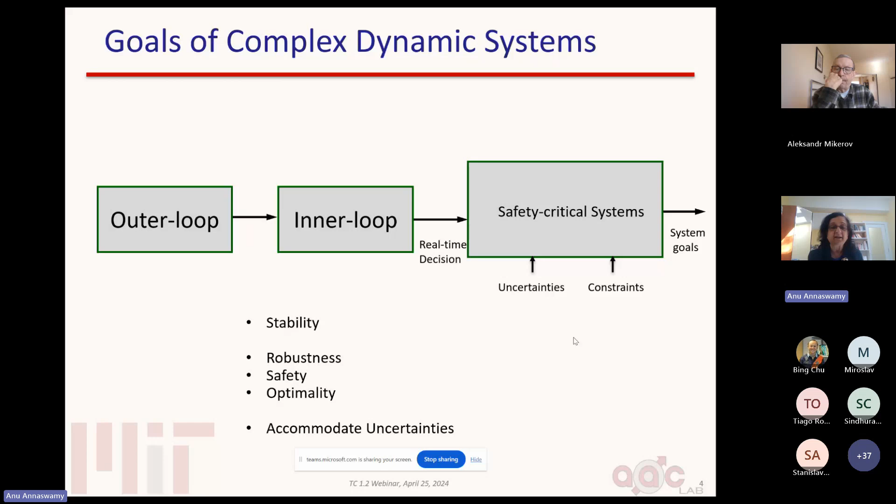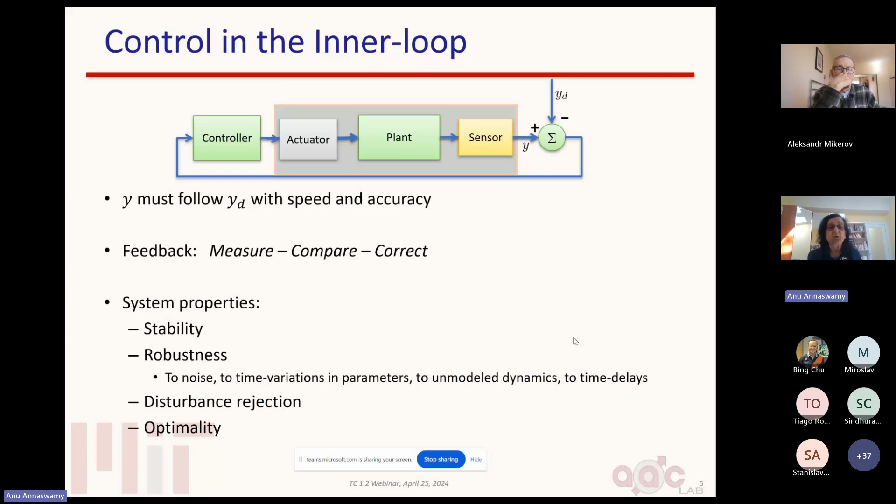As a community, we've been at this for a long time, and we do a lot about what happens in the inner loop. This is basically the origin of how control was defined, and these are the system properties we worried about. If you look at the story all the way from water clocks and flyball governors to control of physical systems, we talk about the footprint, the loci of control in a variety of applications, moving across physical domains of aerospace, automotive, process, healthcare, robotics, and manufacturing.

We are expanding the scope of where controls can play a role, because we look at what happens at the intersection, the nexus between the physical and digital worlds. That allows us to have a handle on these large systems in a large canvas, which brought the conversation to the document being mentioned - that we're not only limited to engineering systems, but really problems driven by societal needs.

Let's just remind ourselves that this is the real framework, the broad framework within which we operate.

The story I want to tell you is my journey into this grand canvas, and the kinds of things that I find fascinating, all of which is really in the context of adaptation.

So if you're going to have uncertainties that occur in real time that you cannot anticipate, and there are actuators that lose their effectiveness, and other kinds of modeling uncertainties, then how do I figure out a way to design this real-time control using whatever measurements you have and from data, so that everything here is data-driven, and whatever prior information you have about the model structure.

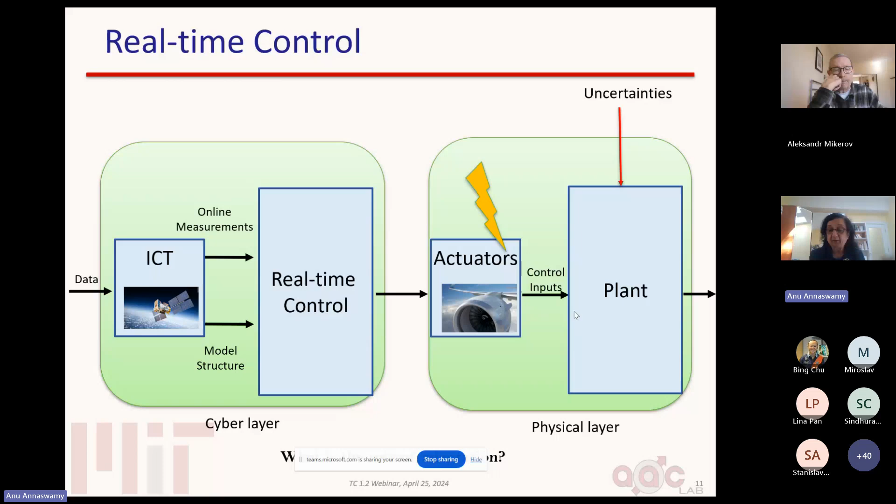I want to basically articulate first - please bear with me if this is a tutorial thing somewhat in the beginning. I was trying to figure out how to gauge what kind of audience I'm going to get, so some of you can probably put me on mute, because I'm just going to talk about some tutorial things and then go on to adaptation and safety, and adaptation and optimality.

The basics of control is about designing the control input in real time so that your state variables and your outputs behave in the way that you want.

But what is unique about it is that we have these learning algorithms as a part and parcel of what we do, and these are of course provably correct. What this provides is not only a way of designing the control input - you come up with these functions C1 and C2 - but you also have a way of learning what's going on.

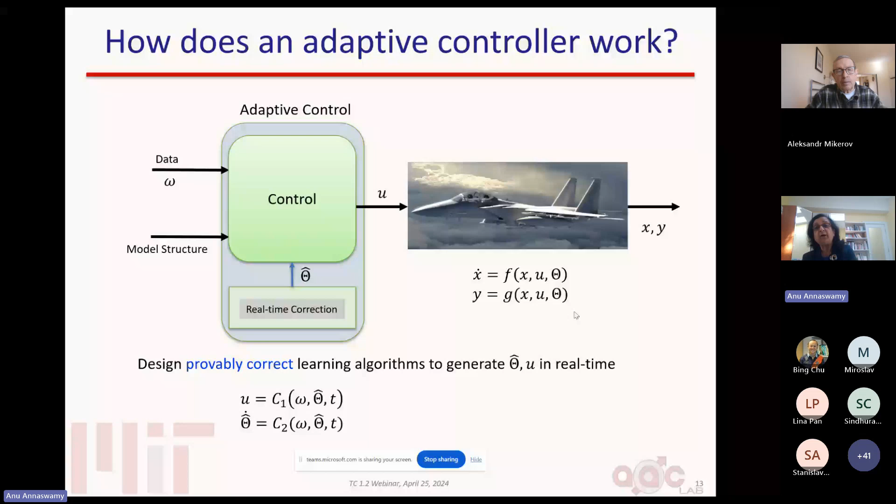And if it is indeed parametric uncertainties, then the parameter estimate theta hat is basically something that learns what's going on. So while you might do control in a faster time scale, with hindsight, you do want to learn. That's really the goal.

So let me walk you through this, in case there are students listening to adaptive control for the first time - this is for you. If you have a simple first order system, the name of the game here is that AP is unknown, and you're trying to design a way to control it.

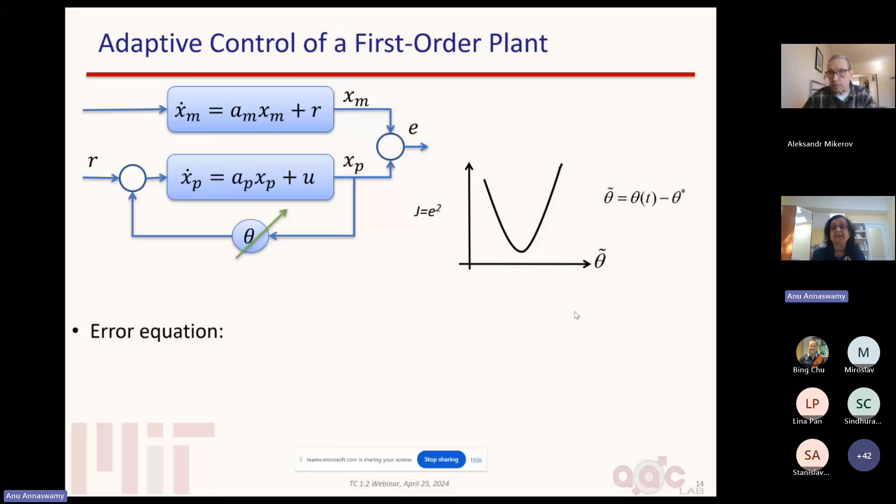You've set up what's known as the reference model, and you look at the error to say, hey, is it possible to minimize this error in some way by adjusting the estimate of what you want in the feedback loop, which leads to an error equation.

Normally, what we would do is adjust the cost function J and look at the gradient, using a gradient descent approach and all of these things. But it's not always possible to make sure that it'll lead to a minimization, because a cost function might not look like this.

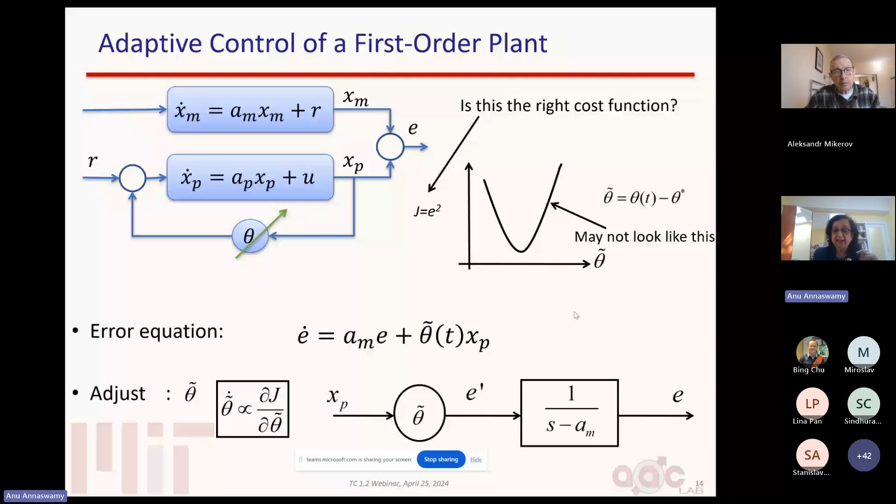It turns out that you can still come up with a way to figure out what the right algorithm is. Ideally you would like, for instance in this particular case, to have access to E prime, which is the signal driving the error, but you don't have that.

So if you were to use this - and there's lots of work that's been done in the extremum seeking literature that tells you different ways you can get around it.

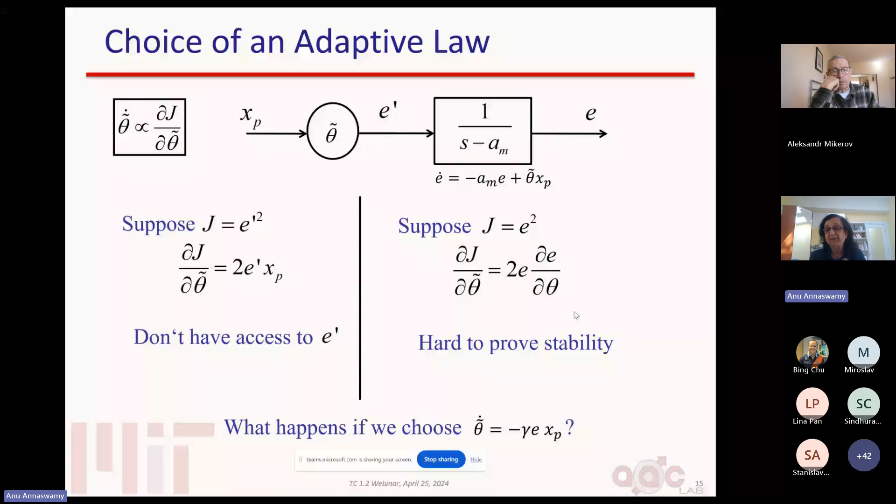But the basics of adaptive control really started out with, hey, what happens if you were to do something like this? The reason this works is because not only are you able to design this controller, but you're able to provide a stability framework that says there is some sort of energy function, a positive definite function that is going to be non-increasing. And so, hey, you have your foundation right.

And we can extend this to when you have all the states accessible. Of course, your Lyapunov function gets a bit more complex. But the idea here still is that you can design a state feedback where you're adjusting the parameter and feedback loop. We can do that when only some of the states are available, using the notion of a strict positive real operator.

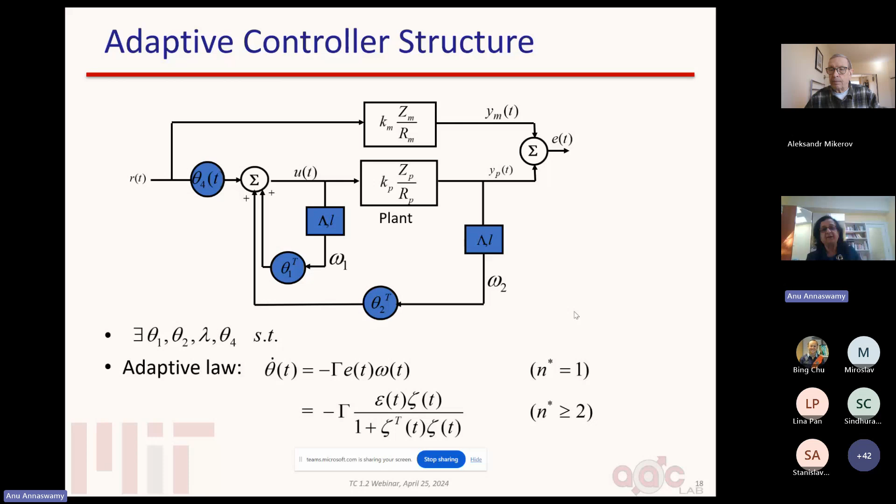And then you can use the notion of augmented error, or there's a variety of different tools right now available. One can use backstepping, with systematically laid out ways in which you can figure out how all of the different parameters that allow can be adjusted when you have a large relative degree between the input and the output. And of course, all of these things can be extended to when you have unknown nonlinearities.

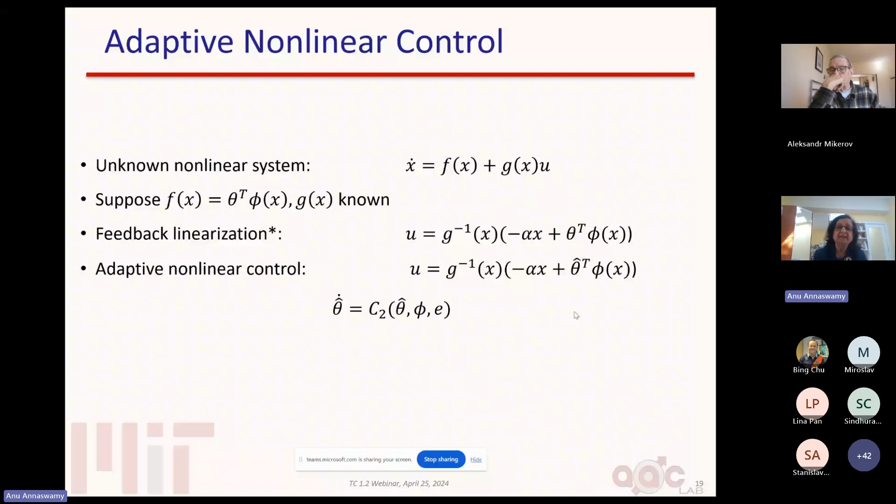And so this is, again, just a very, very simple example. And Miroslav's book really details it very well in terms of what you can do if you don't have feedback linearizing structures. But if you do, then the idea simply is that the adaptive nonlinear control tries to estimate the parameters, and you can come up with ways in which the parameter estimation can be done, and again, provide guarantees.

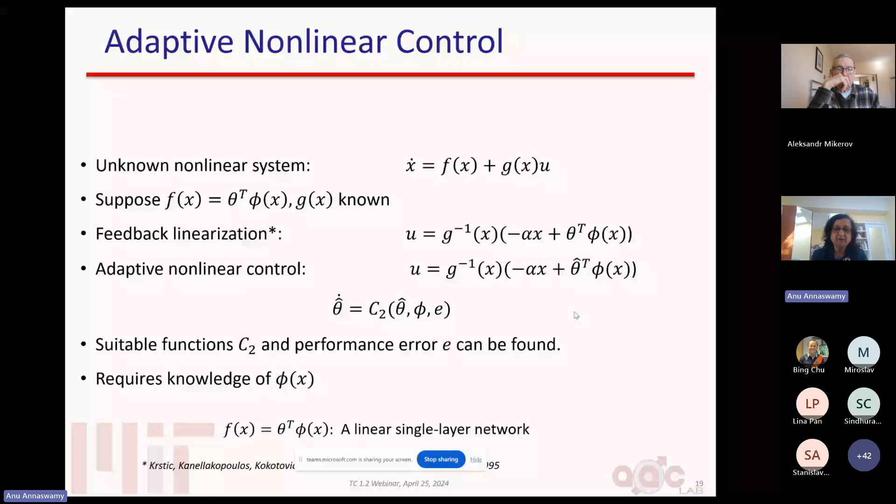And so there is also a link between what one can do between these kinds of things and neural networks. If you start with a simple linear single layer network, then basically they become coincident. And again, like I said, there's lots of other ways, structures that have been laid out very nicely.

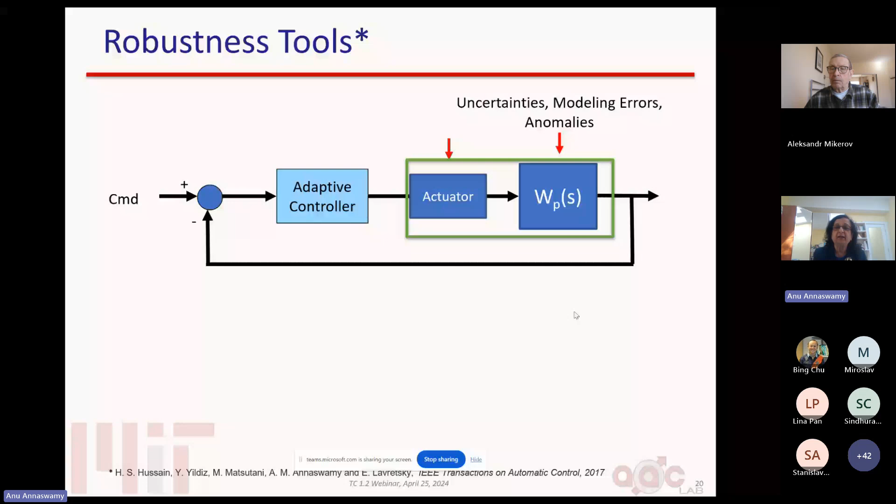And one can take all of these things as a basis and then introduce other kinds of uncertainties now into the problem, which are not parametric, in which case you're not really be able to adapt to them, but you accommodate them using robustness ideas. So here, the notion is that you have some sort of a baseline controller, but then you might have actuator uncertainties because the actuator has some sort of a lag, or there are other unmodeled dynamics. And there are ways in which we can guarantee that there is robustness to these kinds of uncertainties as well.

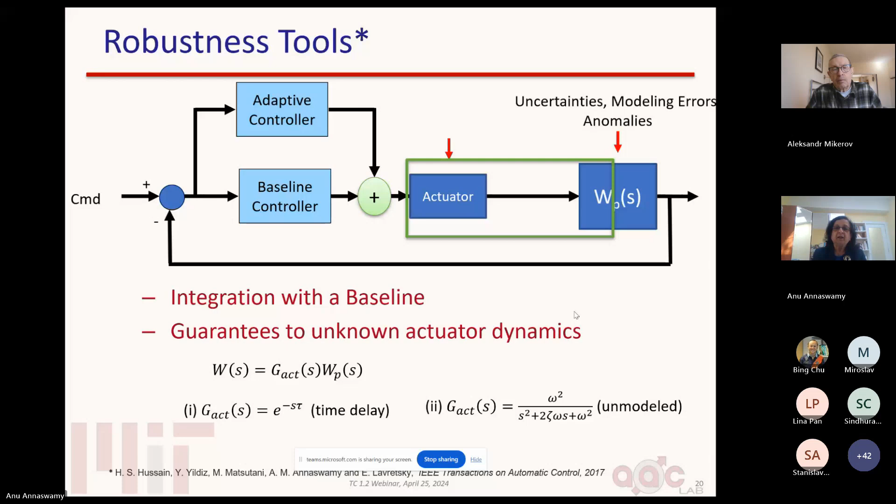Okay, so let's just focus a little bit on learning. And again, like I said before, learning is part and parcel of adaptive control, which sort of distinguishes it from some of the other methods that don't necessarily have an explicit learning component.

And so the idea here is basically that while you are after a certain performance error, you're also trying to learn the parameter. And so the parameter error, the parameter estimation algorithm, gives you a way of learning these uncertainties.

And again, I'm happy to have an offline discussion if there's more questions on this.

So how does this happen? How do you actually guarantee that you can learn? You basically invoke the concept of persistent excitation, that says if you have these properties where whatever is driving your parameter adaptation, which is some sort of a regressor that consists of key variables in the feedback loop, if there is a certain uniform observability property, there is a linear independence in the data that you're getting, there is some excitation in the data that you're getting that allows you to probe all of the modes of the system, then that allows you to get to learning.

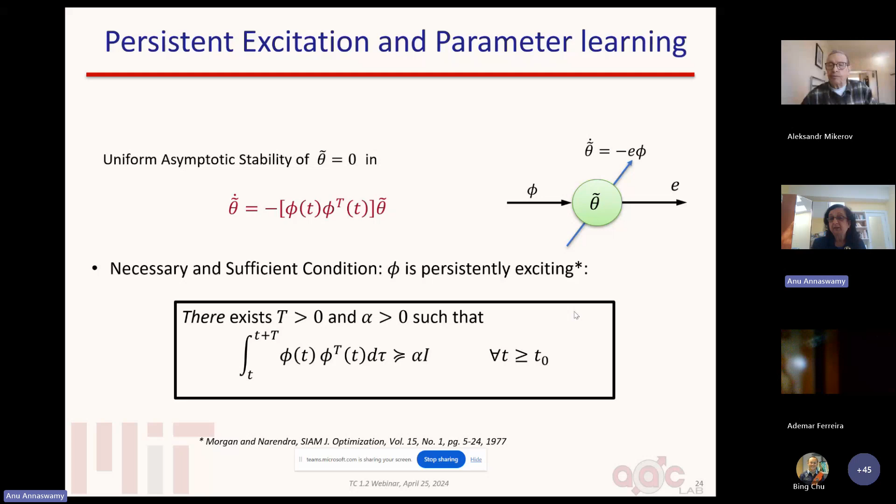And what is great about this is that this is not just a sufficient condition, but it is necessary, which means that if you don't have it, you really cannot have learning. Now, excitation means that your exogenous signals, your command signals, whatever is extraneous to the feedback loop, needs to have these properties of excitation, which is also known as exploration in the machine learning world. So now, if you can't do that, if that is counter to what your mission goals or system goals are, then you have a problem, which is that you really are not able to learn.

Which brings us to imperfect learning. So it is possible that performance and learning, in some cases, are conflicting objectives, which means because it's a necessary condition that you have excitation, if you don't have excitation, you have to acknowledge the fact that you can have imperfect learning.

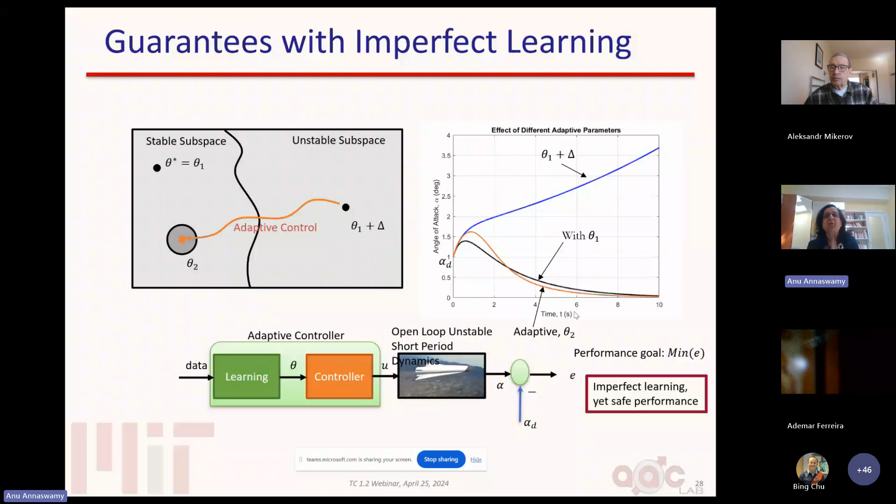Because you're in that null space, you're okay, and you can accomplish safe performance even in the presence of imperfect learning. This is a very, very important point that is really missed by a good part of the machine learning community, unfortunately.

So you have to keep this in mind. There are some excellent papers that Brian Anderson has articulated which get into a lot of the details, but here is the main idea.

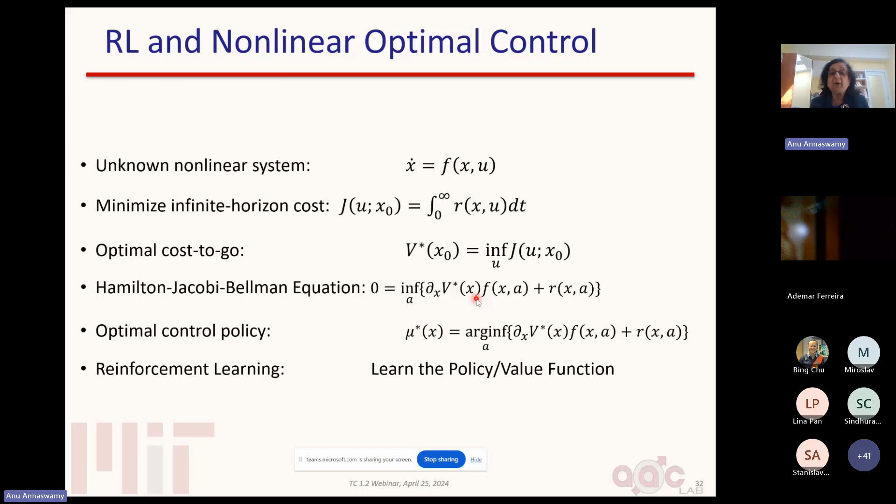So reinforcement learning is all about learning the policy function or the value function. The problem basically arises when you bring in uncertainty. If everything is certain and you know all the different transitions, you can evaluate the cost across each of these branches, and that's great — you can use dynamic programming, which gives a very elegant solution for HJB equations.

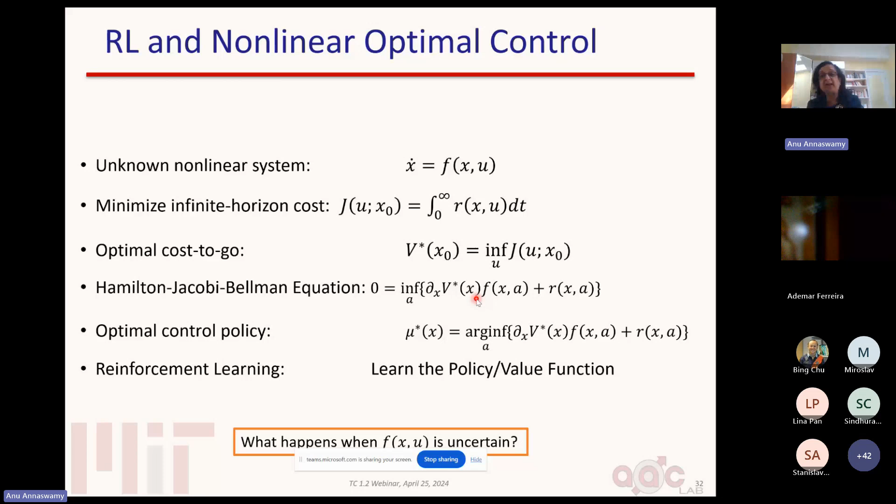But the problem comes in when you have uncertainties. Now all of these value functions have to be replaced by their estimates, which is where neural networks have really come into the story, bringing in a parametric structure. And the moment you bring in a parametric structure, there are all kinds of parallels to adaptive control.

In this case, what we're trying to do is say, I don't know something — the value function or the policy function — so use a neural network to approximate it. In order to do that, you come up with some sort of parametrization of that structure.

The nice thing is that there's a very nice basis of universal approximation that says, yes, if you use these activation functions and several layers, the deeper it is, the deeper the learning. All of this gives you a way of approximating any arbitrary nonlinearity, and you estimate the weights using this well-known gradient approach we've discussed, which brings in the notion of a backpropagation algorithm.

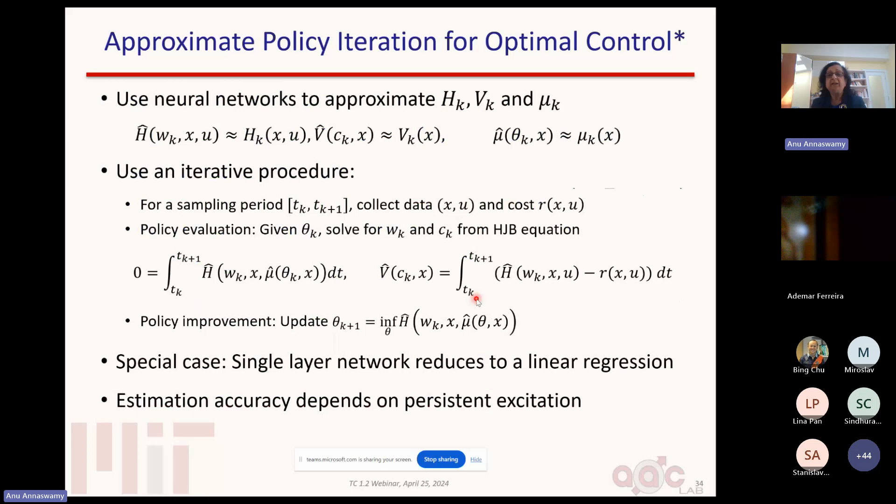It turns out you can do all these approximate policy iterations and so on, an iterative procedure. But I want to focus on a couple of examples where, if you take all of these things, you can come up with analytical guarantees.

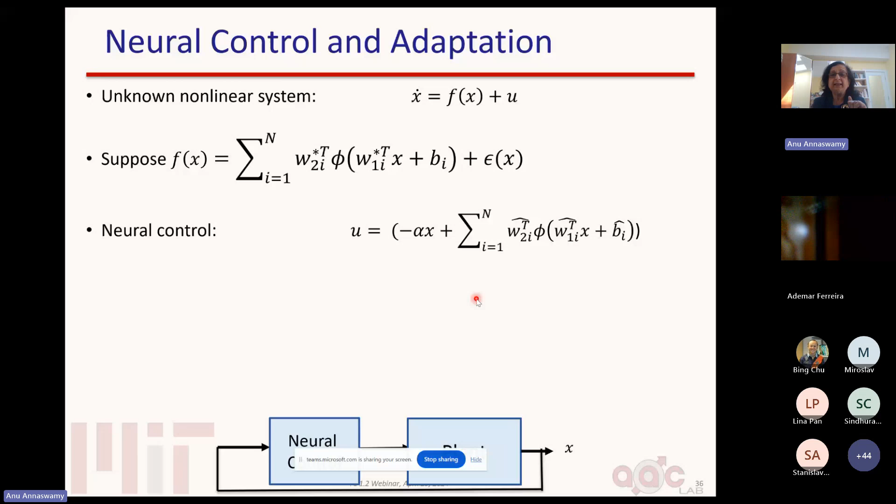This is one we did more than two decades ago, where we say, okay, here's a nonlinear system, and I'm trying to come up with a controller. Let's suppose I use something like this neural network. Then, is there a way in which I can come up with an adjustment procedure?

This problem is extremely difficult and really open. Nobody has been able to come up with a complete, accurate solution. The reason is that the problems of non-convexity have to be addressed, and the stability of adjusting the nonlinear weights addressed, because even though W2 might be linear, W1 is not, and that's where the difficulty comes in. There are all kinds of errors of approximation.

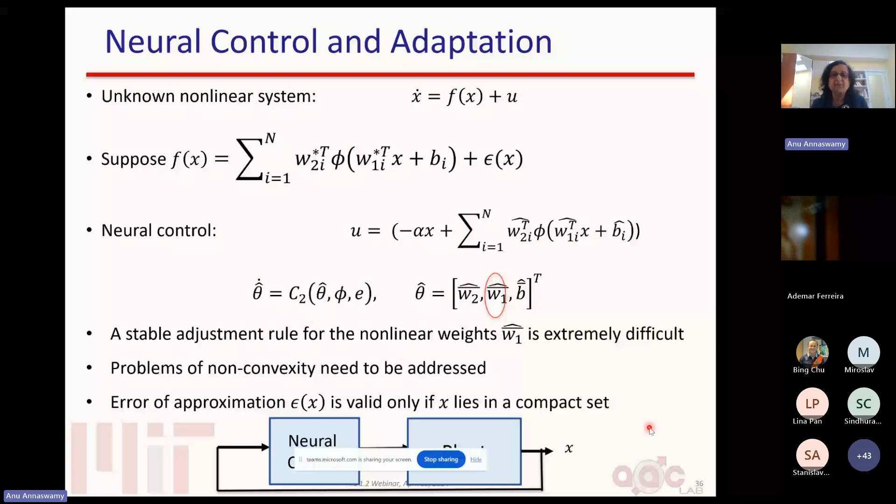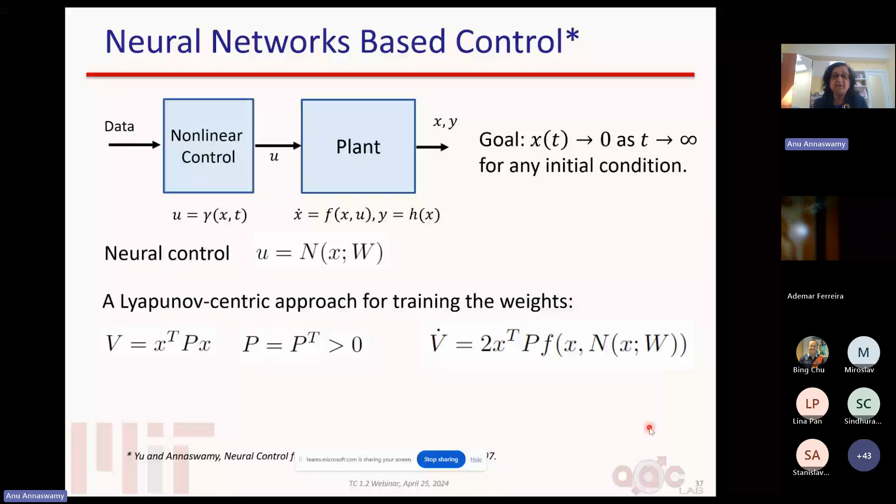I'm not going to go into the details, but basically what we were able to show was that if you use this neural control, you can come up with a Lyapunov-centric approach for training the weights. What you do is look at the corresponding derivative, pick a desired target, and use this difference between the desired target and the actual derivative as a loss function. When you introduce this kind of training procedure, you can come up with a guarantee that this neural network-based control can give you stability.

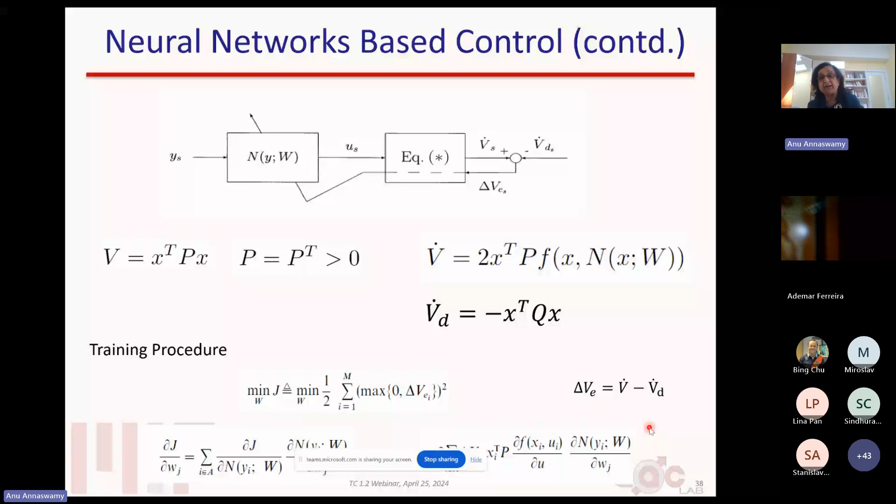So it's one of the few results that basically tell you that you can use this neural network and guarantee that locally you are able to get an approximation. The nice thing is that you can really look at very nasty nonlinearities, and it gives you a way of actually coming up with a neural controller.

It's an added advantage if you were to just linearize it, and because we said it's a local result - if it's local, hey, why not use a linear system? But we can clearly show where the adjustment from the neural controller comes in, so that it really expands the scope of what you can do, and that's very clear.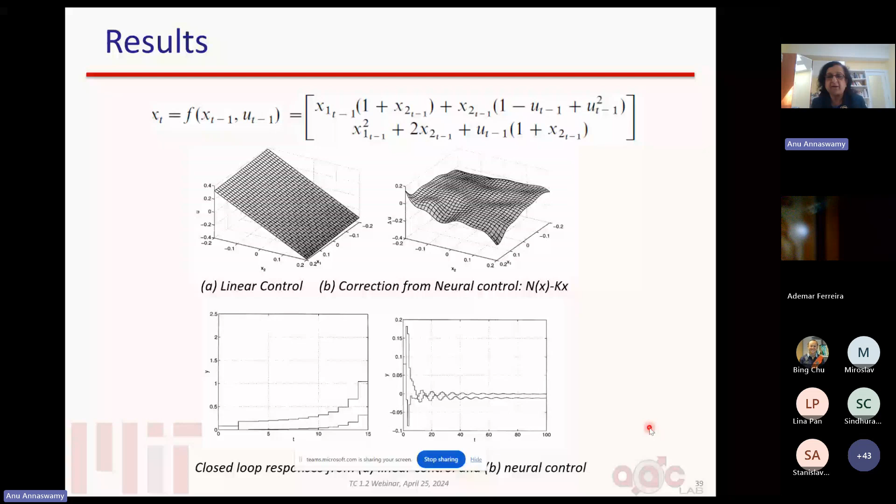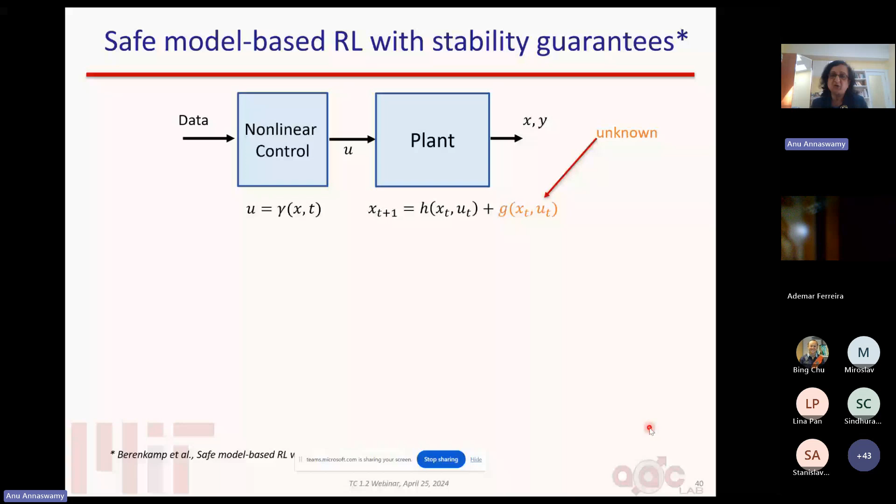There's also been other interesting results or ways of looking at this problem. Here is one that I find particularly compelling: if you have these extra uncertainties in the form of this nonlinearity G, you can still design the input and have an optimal policy. The optimal policy basically comes out of this particular inequality that you need to minimize.

The nice thing about it is that the way this is structured, the cost function is picked in a way so that it's not just optimizing from minimizing a cost function from an optimality point of view, but basically integrating it with a stability point of view, such that all of the solutions you find for your policy should be such that the corresponding Lyapunov function candidate is inside a level set. By doing this, they were actually able to essentially guarantee it.

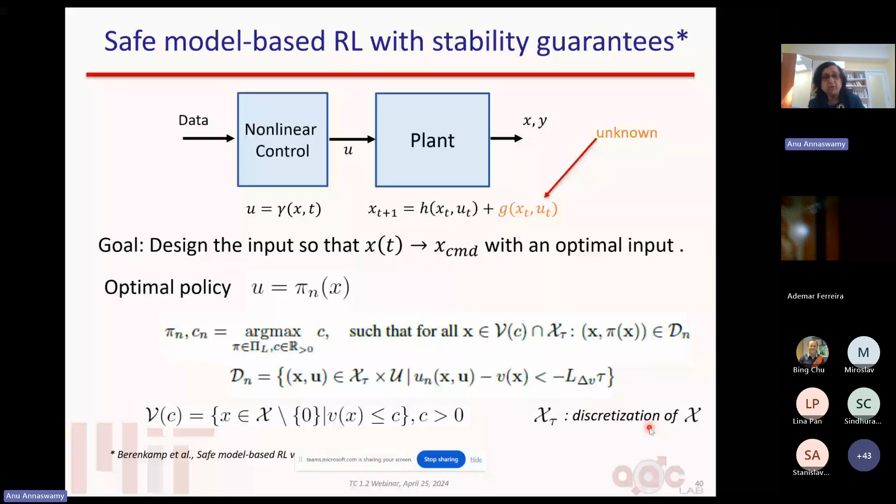So this is basically the whole world of safe reinforcement learning, which says that this kind of structure allows you to make sure that you stay within a domain of attraction for a certain region of initial conditions.

Sorry, is there a question? Yeah, sorry, Anu. If you look at the screen, at the bottom, there's Teams sharing screen - stop sharing, hide. Can you click hide? Okay, got it. Thank you, yeah, thank you. I didn't know what to do with it. I thought I was seeing it only at my end. Thank you, Bing, I really appreciate it.

Okay, all right. So they also provide a nice implementable training procedure, but you have to keep in mind that the tools that have been proposed for stability are often not exactly the same as the tools that have been shown to be very successful and doable and implementable. So there is a big gap between what is analytically justified versus what actually goes on in terms of the practical implementation tools.

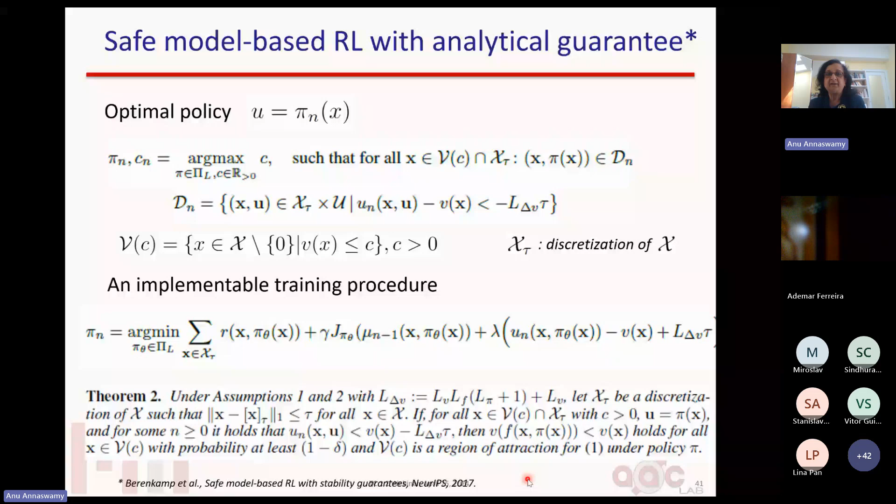So all of this is basically what I wanted to say in terms of adaptation and learning, and I hope you see the rich intersection and integration between these concepts that are really joined at the hip. There's so much more to do to really understand how these things can be played.

But I want to now move on to other systems goals, and the two things I want to talk about are safety and optimality. So let's start with safety - we're really talking about state constraints. There are any number of problems where you really want to make sure you meet a certain performance, but at the same time really make sure you do not wander into unsafe regions.

In the context of cruise control, you want to follow a lead vehicle, but you want to make sure that you always maintain a certain distance D. So anything where your position is less than D is unsafe.

Same thing with aerial vehicles. If you have missile dynamics, you don't want to stall. At the same time, you want to meet whatever your performance goals are. In robotics, obstacle avoidance, you want to reach your goal and target within a certain time, hopefully optimally, but you want to make sure that you don't hit any obstacles.

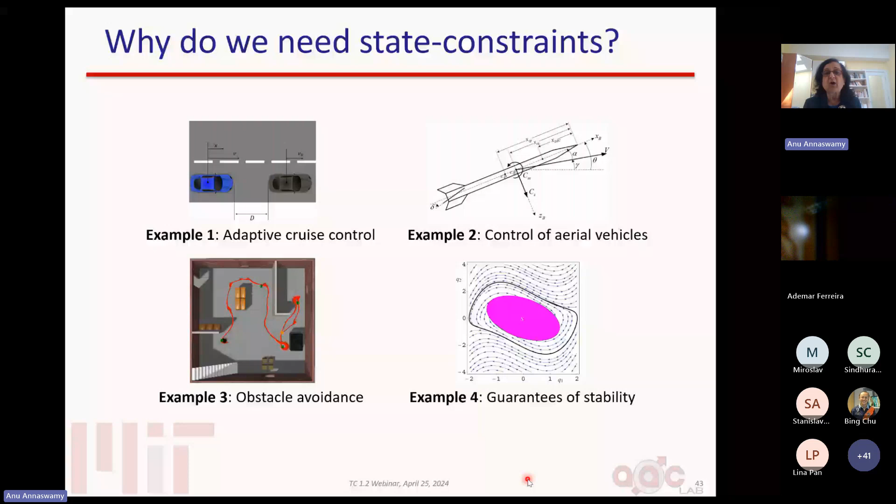So there are all of these kinds of problems that say anything you're trying to do has to meet safe constraints, and it's not easy to do that.

Because let's say you're looking at theta and theta dot as the state variables, and here's a phase variable plot on the left side. If you really only look at the baseline, and the ellipse is the safe region, you can start somewhere, but you really don't know these level sets in terms of performance.

So you wander and you go way outside and you come back. Obviously, this is not something that you want. It's not a good idea.

Whereas it is possible, as you learn and integrate some of the key pieces. One of the tools that has become highly popular recently is what's known as control barrier functions.

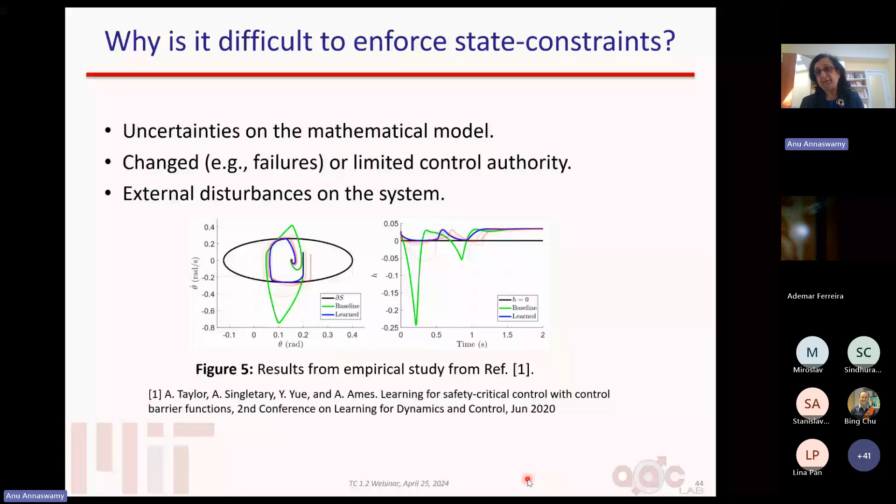These then allow you to learn how to be safe, right? So that's really what we're after. So let's now bring in the problems we've looked at. Is it possible for us to do both—have performance and at the same time remain safe—when you have real-time uncertainties? That's the challenge here, and how do you meet these two things?

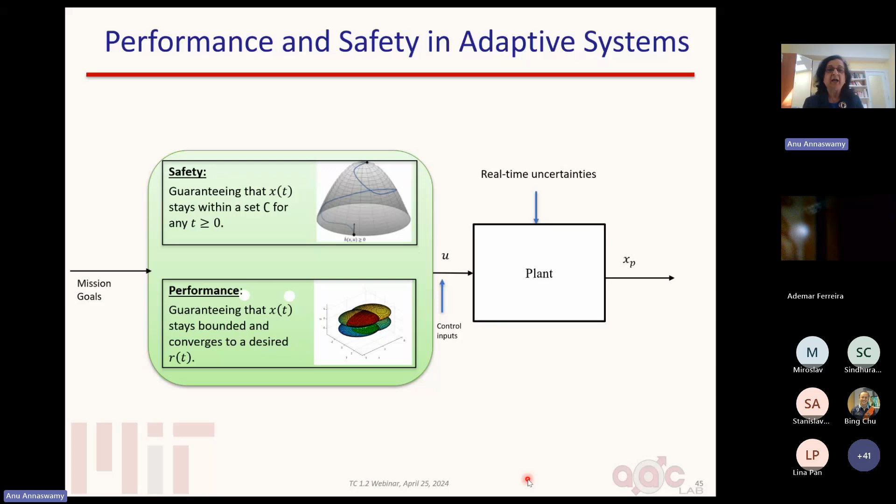There's a more philosophical journey one can take here, which is that real-time decisions—things we do in adaptive control—are one kind, and those that come out of CBF types of designs are another kind. You can argue that what we're trying to do is always predicated on a structure of a model, whereas the computational control pieces come from model-free kinds of things.

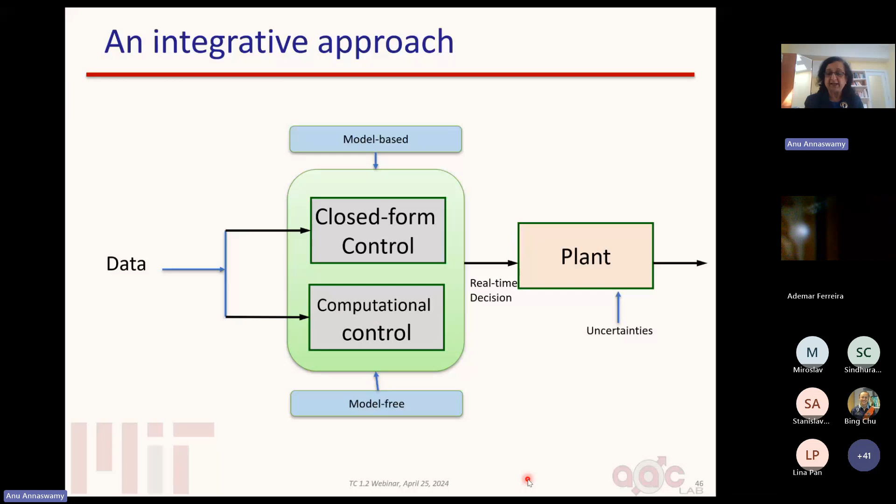Let me explain. One of the examples we did—I'm going to skip the video, not play it here, but play it later—is a closed form example. In this particular case, it was a quadrotor, and here is a structure that we imposed on the controller.

We stuck our neck out and said, for whatever reason, I'm going to have a state feedback structure. And as far as I'm concerned, I'm going to search within the manifolds determined by this closed form expression. Here is basically how I'm going to carry out the adaptation. And it turns out it works—again, I'll show this later.

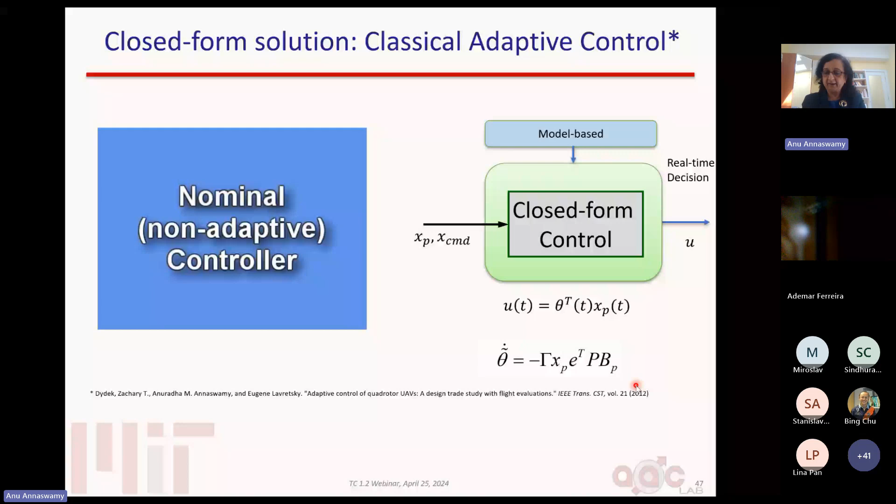Computational control, on the other hand, says I'm going to come up with a real-time decision which basically spits out the control input, and it has to be such that it satisfies this implicitly—I minimize something subject to something. So I'd put this under a computational control thing, where you're not asking for a whole lot of information or imposing assumptions on what F and G and all look like, but you're basically saying, if this is satisfied, then I have a safe way of going forward.

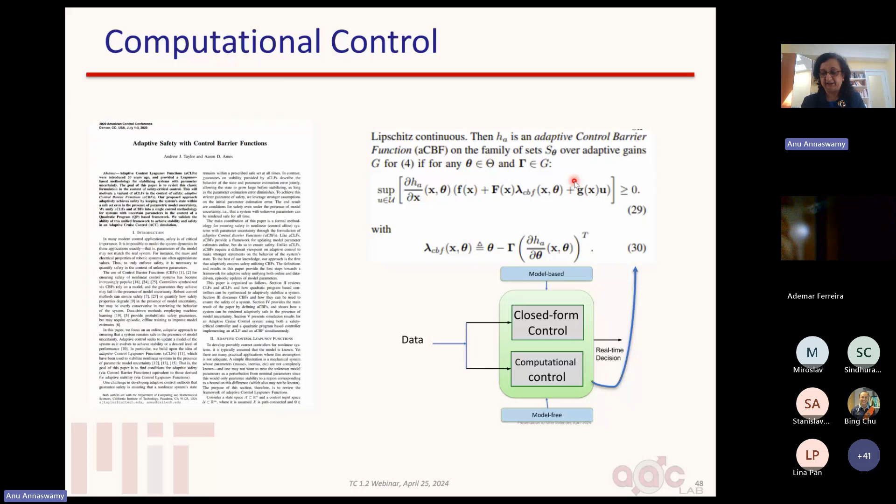So the question is, is it possible to combine these two? We've started this process, and this is just a recent result from our group, which says yes, here is a way to do this. And this is sort of how the structure looks like.

The idea here—and there's a lot of stuff going on—everything in this block is adaptation based. And where we basically bring in elements from CBF is in the outer loop. But there are some very key integrative pieces that have to come in.

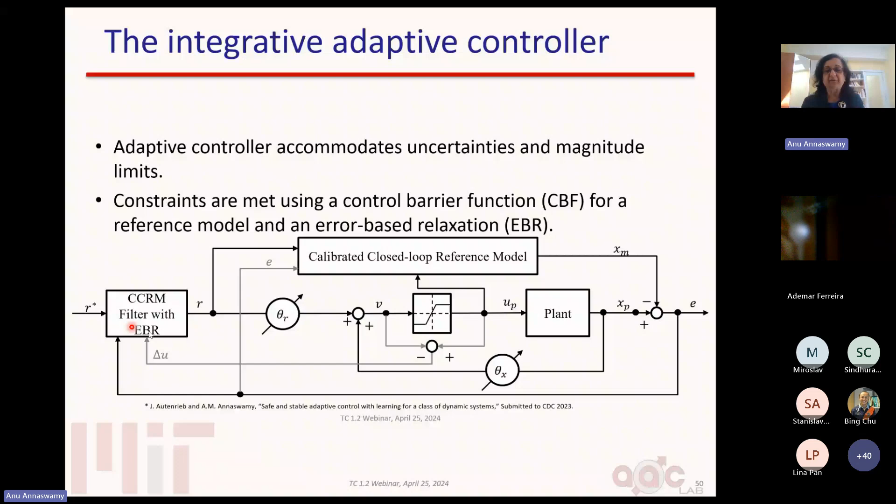One comes because you introduce some bells and whistles in the reference model, and another comes because you introduce some important additions to the CBF filter itself. When you do all of those things, the structure basically looks like this, and here are some of the technical details.

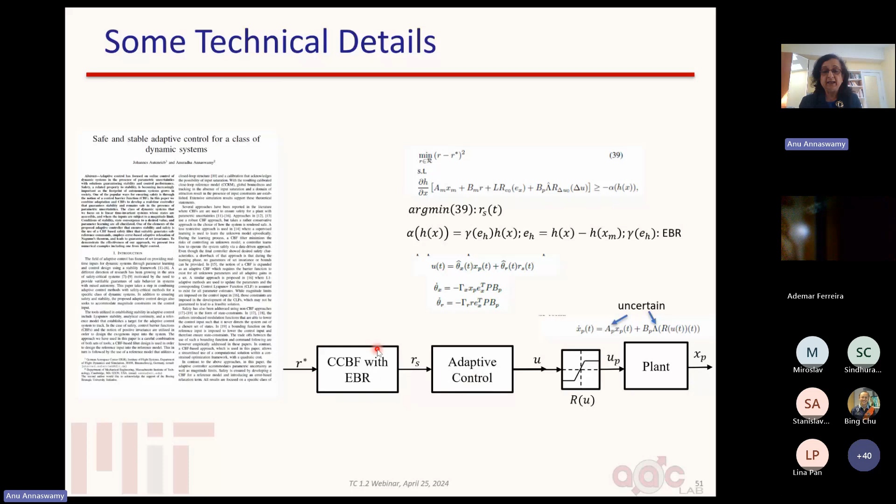So when you have uncertainties in the plant, and you have input constraints also, it turns out that this is how you can stitch together adaptive control and control barrier functions. Let me give you some examples. The technical details, I'll let you peruse in the CDC paper.

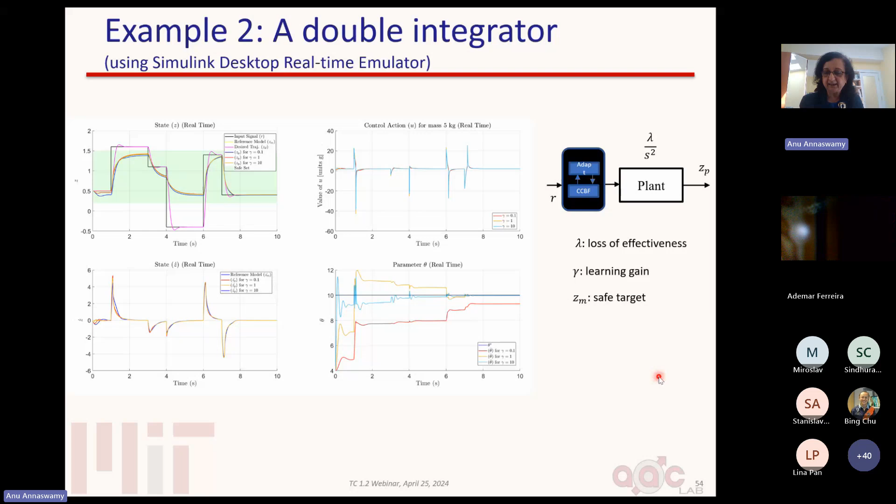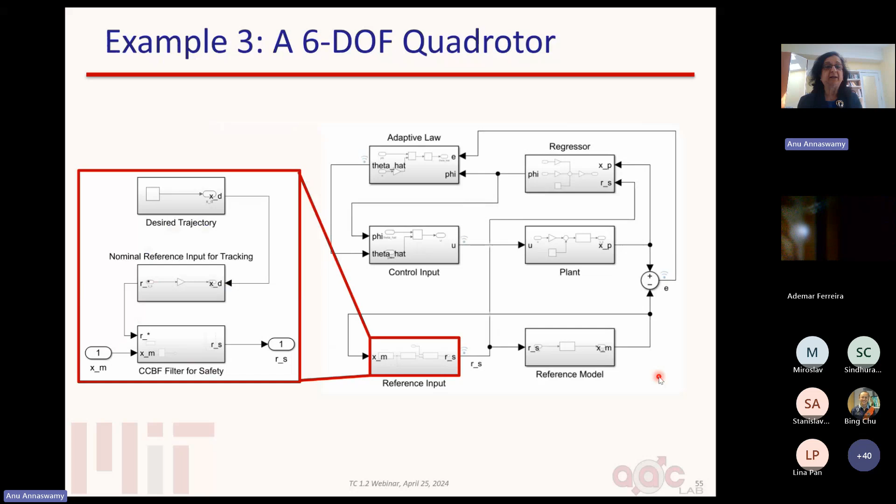We then took it further and made it multivariable. What if you have a 6-DOF quadrotor, which basically has a much higher relative degree? So we then came up with the CBF structure as well as the adaptation. Let me walk you through the examples here.

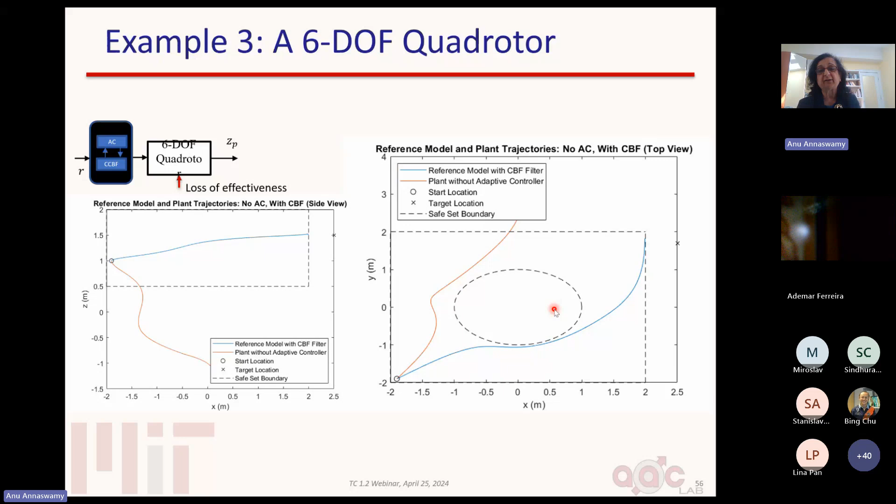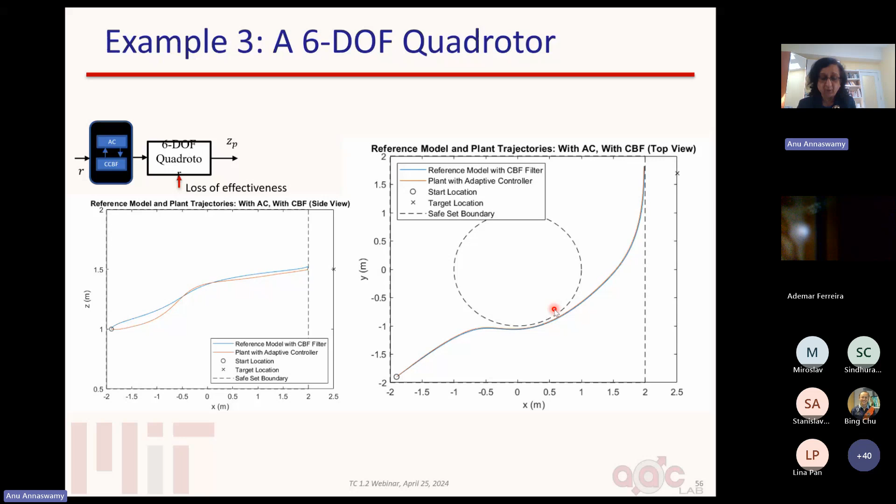When you combine both, you can see that you are indeed able to do both. And I think in the interest of time, I do have animation, but I'm going to skip it and come back to it if we have time. Okay, so that's adaptation and safety. That says there is a way in which you can do both. And let's see if we can integrate it with optimality.

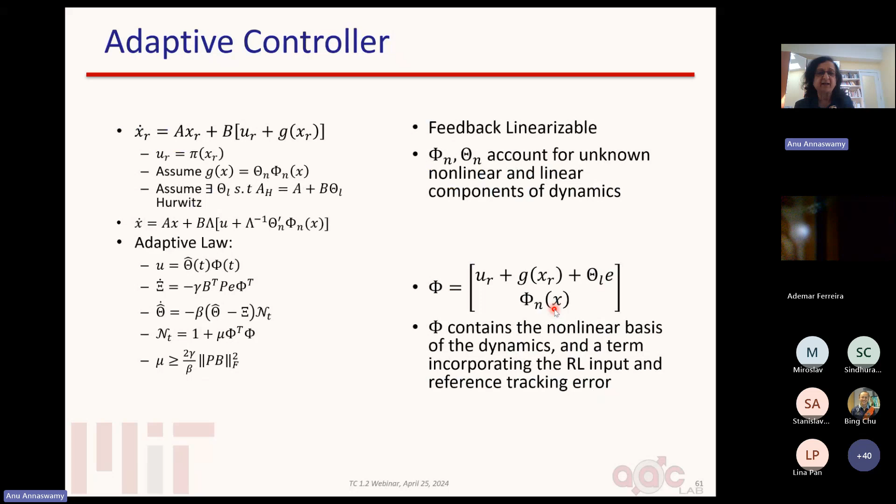So again, I want to bring back the notion of reinforcement learning and combine the elements, which basically tries to look ahead and have a notion of optimality so that you're minimizing this cost, even while staying stable, whereas the adaptive controller is online. So we've come up with an architecture that combines both, relegating the role of reinforcement learning based optimality control to the outer loop, and the inner loop introduces adaptation, with some very careful integration pieces. Here's the overall structure, and we considered a nonlinear feedback linearizable problem, which required us to identify the underlying regressor that we need to employ in the adaptive law.

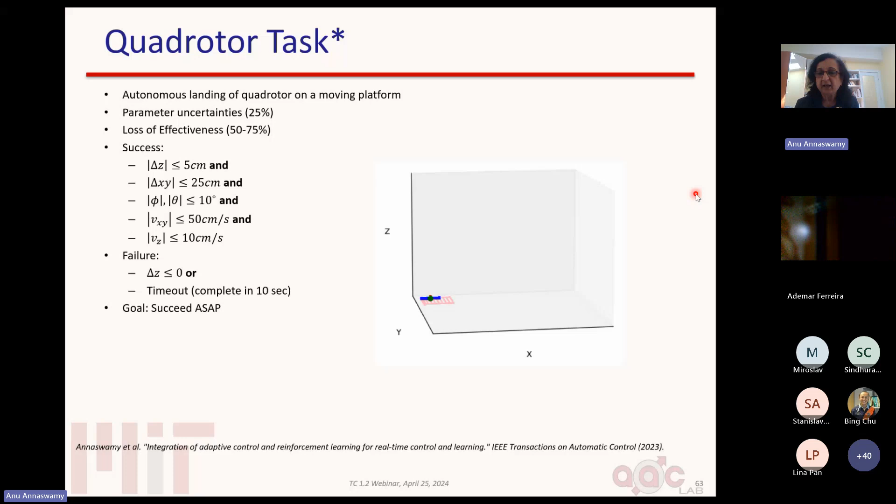And with that, we were able to come up with a stable solution. So the task we carried out here is one where it's a quad rotor, and it has to land on a moving platform. The reason RL is a very suitable tool is because the cost function doesn't have a quadratic structure. It is more unstructured, so it says: don't crash, don't have too much variation in the XY plane, don't wobble too much, so some of the Euler angles need to be constrained, etc. And you want to make sure you land within a certain time. Because of all of these things, it turns out you can use this RL structure and a very nice training procedure, and by doing that, you can carry out adaptation and optimality.

So I want to play this. Let's see how I would do this. Okay, so here is the quad rotor, and the one with the white thing is the one that was incapacitated. Are you able to see the video?

Yes, okay. What you're seeing now is with adaptation, and the adaptation is because the propeller blade is broken—we deliberately broke it and stuck it with duct tape, and in flight we introduced this parametric uncertainty. So that's what this is doing. And what this showed is that adaptation does work very well for these kinds of quad rotor problems.

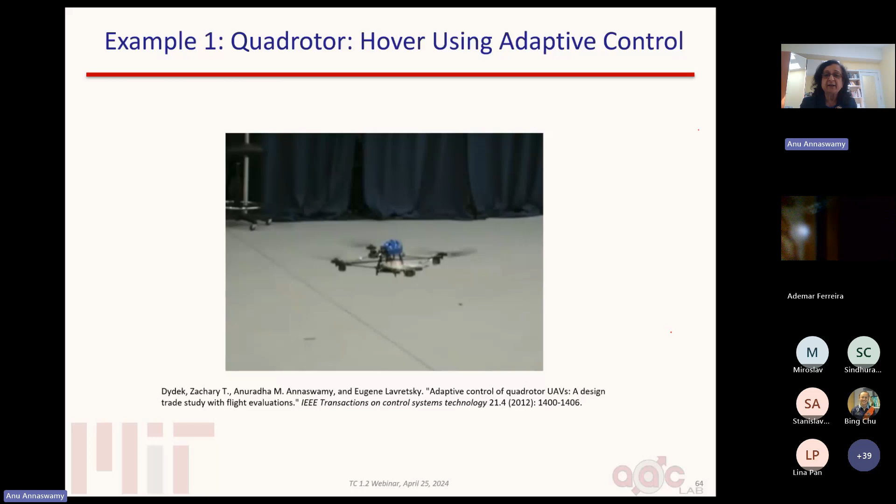So that gave us the starting point for the moving platform story. Again, here we introduced 50% loss of effectiveness mid-flight, just like what we had done in the video you saw. What this allowed us to do—when you only have RL and you don't have this inner loop component due to adaptation, you're really not able to have the success rate you want. In fact, in this particular case, it crashes. Whereas the adaptive controller is able to do much better, not only making sure that it lands, but also doing it in the requisite time, as shown in these kinds of metrics.

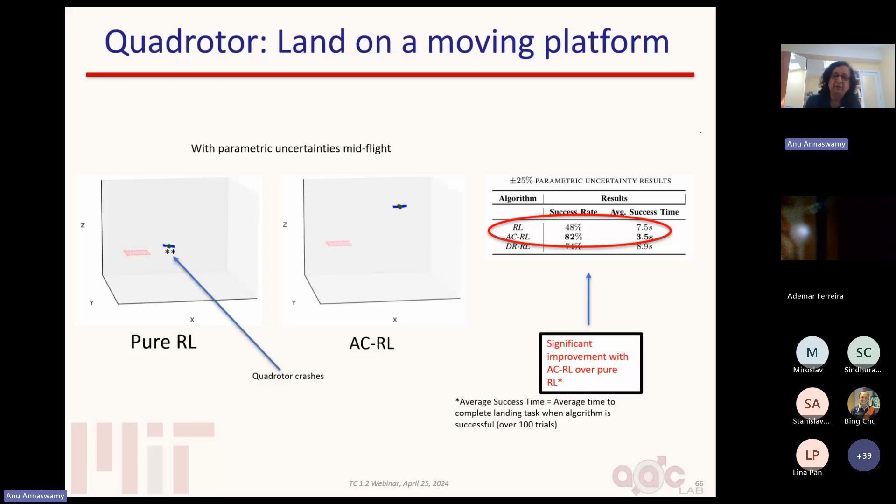And we also compared it with other kinds of RL methods that have distributional shifts and domain randomization. But in all of these cases, the advantage is that there is no need for training, and it allows you to get much better metrics with much less computational effort. This is because the adaptation allows us to keep track of the variations due to errors in modeling. And that gives you a way of keeping track of the deviations from what the reference model is doing versus how the actual system is performing. Because of that variation, you're able to integrate the control actions better, and make sure that you really track well.

So another example I want to walk you through when it comes to integrating optimality with adaptation is this—again, a problem that has been studied a lot, especially in the last few years, in the machine learning literature. It takes the very standard LQR problem that we know well, where you've got measurement noise, but on top of all of that, you also have parametric uncertainties, and you want to stabilize it and converge to this optimal cost.

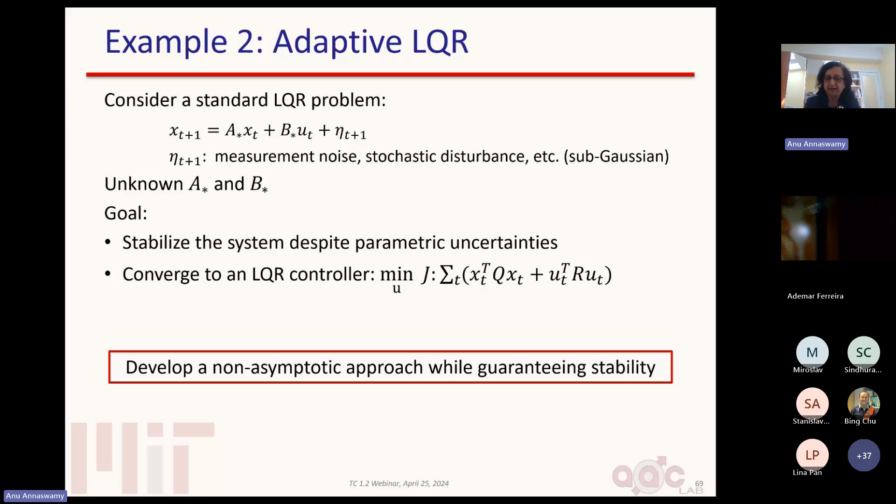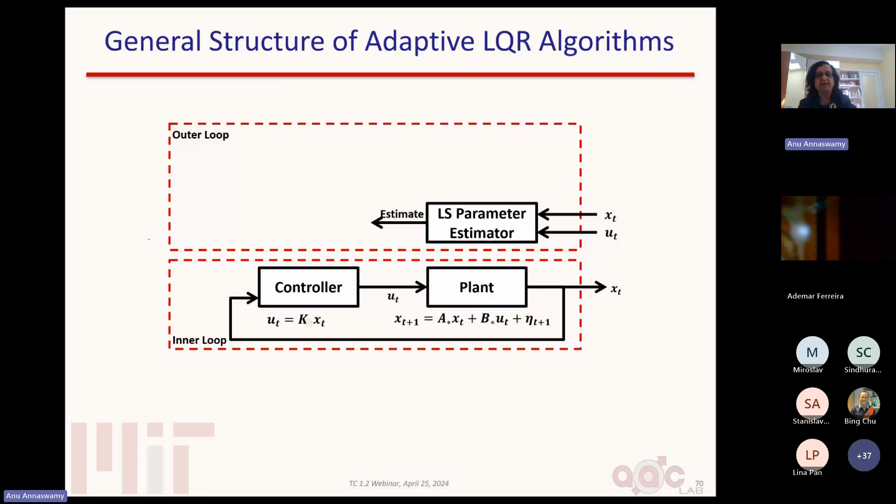Essentially, you're taking all of this data and using a least squares parameter estimator to come up with an estimate, and use that estimate to calculate the new feedback gain and repeat the process. You calculate this feedback gain based on some sort of metric, a threshold. And if you find that you have enough new information from the underlying regressor, you compute your A star and estimate of A star and B star, and therefore now you have a new gain.

So, very straightforward, well known to many of us in the adaptive control community. The problem then is, how do you make sure that this V sub t has useful information? You need to introduce excitation, and they introduce excitation in the form of noise—this is the exploratory signal. There's another story I can tell you in terms of robust learning, but let's assume it's okay to do this.

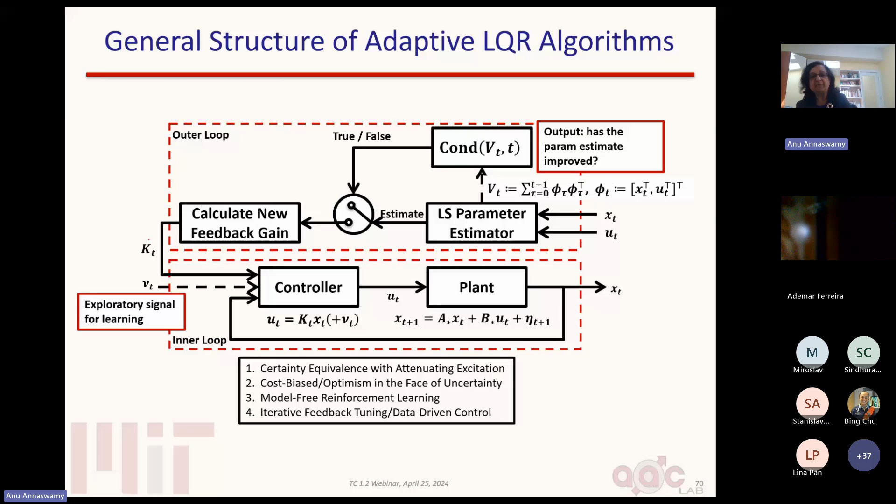There are all kinds of methods proposed in the literature, but there are a few problems. The first is that you need to gather data for a while, and while you're doing that, whatever K sub t you put in better be stabilizing. So even though you don't know A star and B star, you need enough information to say here is a K that is going to be stable. But then, what if that's not the case?

That means we need excitation to learn very quickly and stabilize. So the question is, is it possible? You need that—stability relies on excitation, and the initial controller must be stabilizing. So these are already the first two problems.

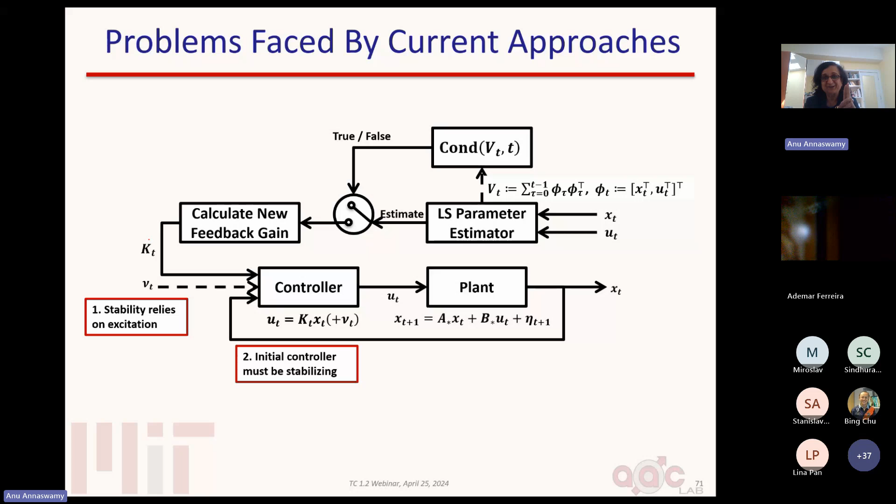And the third problem is that because your A hat and B hat may not be accurate, you want to really search for what is known as a nearby optimistic parameter. This makes the optimization problem really very difficult.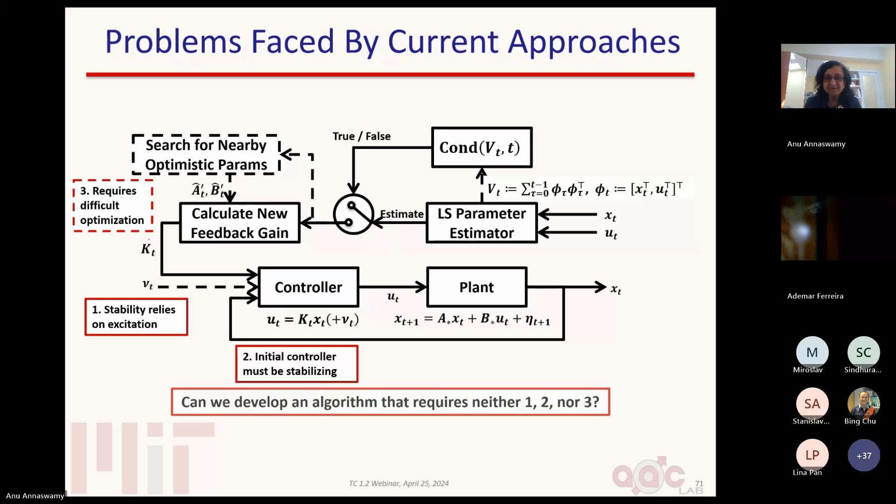So the question is, can we develop an algorithm that doesn't require any of these things? This is our approach, based on direct model reference adaptive control, that allows you to design a controller that really does not require the initial stabilizing condition. You do introduce excitation, but it's a next step—it's not something you are limited by.

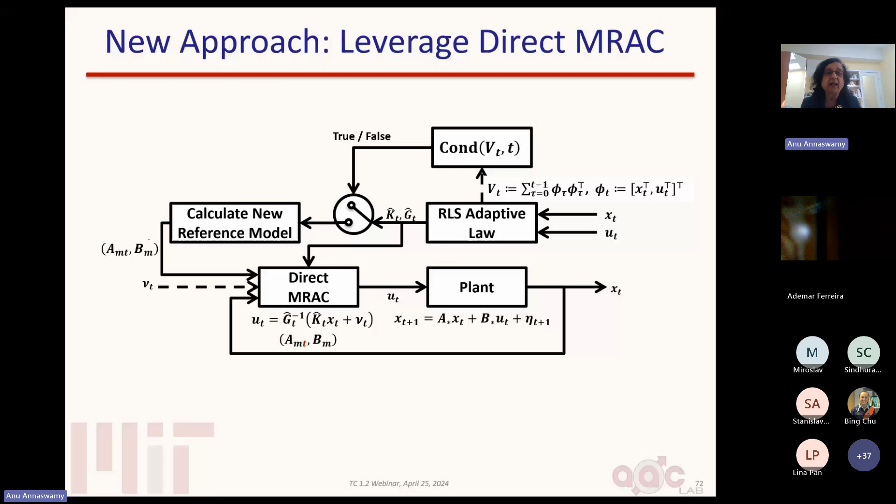The RLS-based adaptive law basically gives you a way of calculating a new feedback gain. That in turn is utilized to calculate a new reference model, because you have new information and the system is different from what you thought it was. So it doesn't make sense to have the same target that you imposed assuming your plant was in the nominal state. That in turn allows you to do better, and that's how you get to optimality.

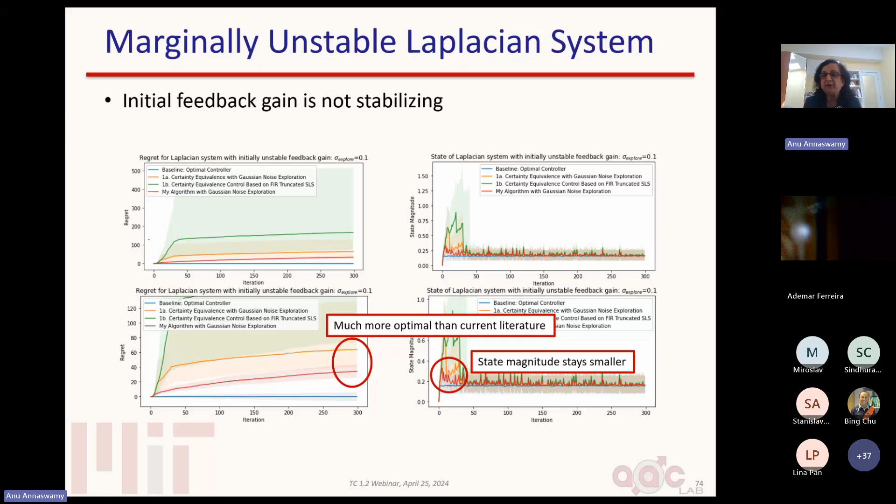What this shows is that our approach is the red, and we do just as well when it comes to looking at the regret and the state. But compared to the current literature, you're able to do much better and get much more optimal results than before—that's the red. It also shows that the state magnitude stays much smaller when the initial feedback gain is not stabilizing.

We also looked at a 6-DOF quadrotor, and here too you can see that you're more optimal and your pitch angle stays smaller.

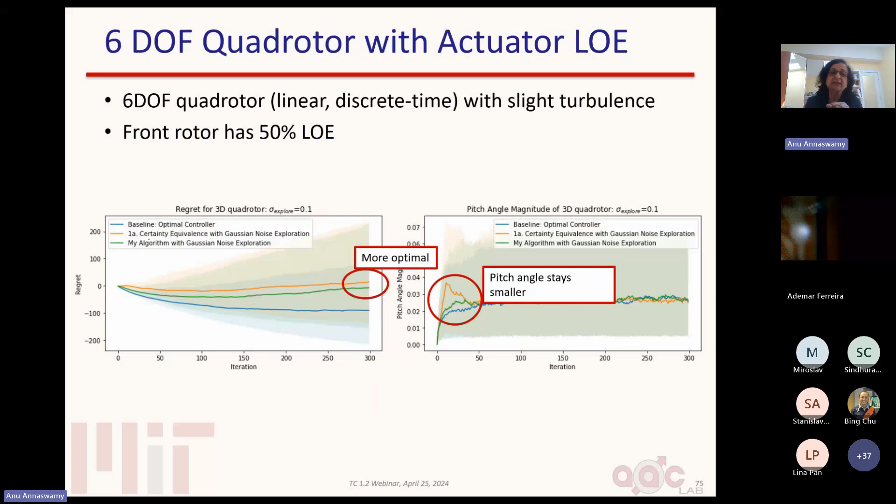And so these are the advantages of having this kind of a direct approach. So that's basically what I wanted to share with you.

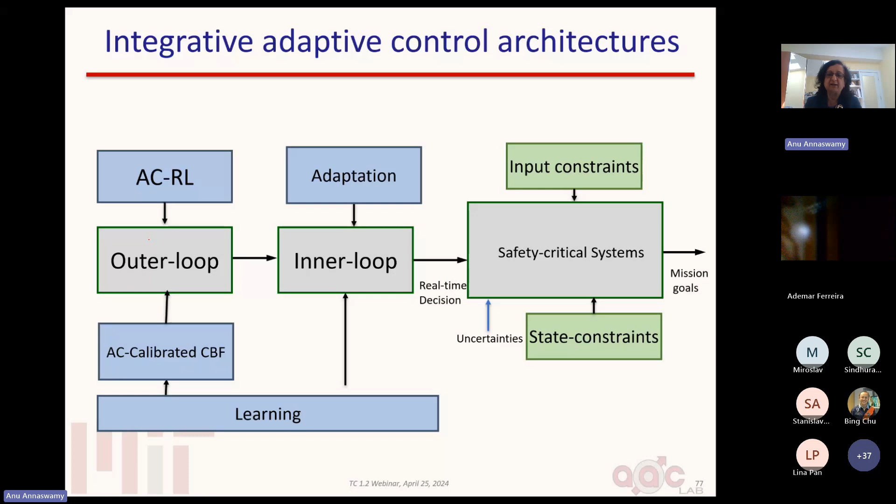Adaptation and learning have a very rich interplay, and there are all kinds of things that we need to watch out for. There are ways we can expand the scope of what we're trying to do with adaptation to include broader goals of safety and optimality, and ways we can stitch those together. All of these give us ways of expanding the scope of adaptive control to include not just inner loop metrics, but also outer loop ones that give us safety and optimality.

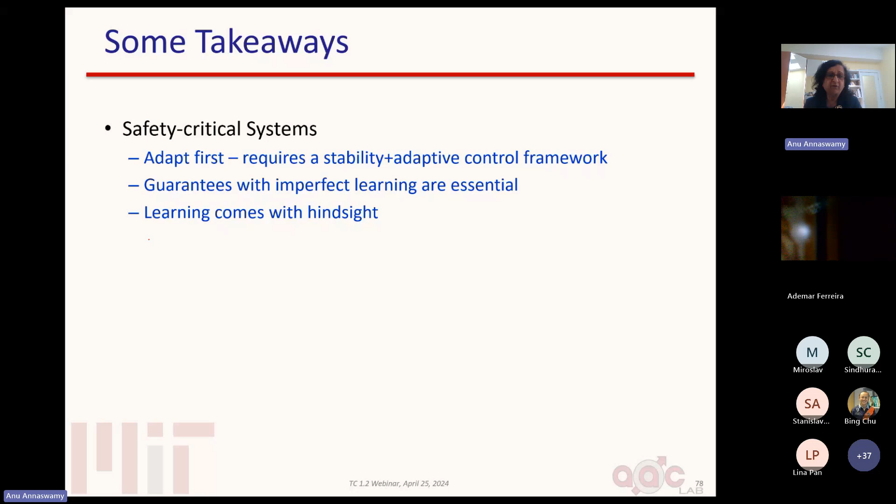One of the things I really want to underscore is that sometimes you really need to adapt first. You need to control first, and you need to have guarantees with imperfect learning. Learning is something that comes with hindsight. So in order to go towards fully autonomous systems, it is imperative that you have real-time decision-making tools with analytical guarantees. We also need to integrate with other building blocks, which is very possible. Sometimes it's not always learning for control, you do need to address control for learning and make decision-making under various timescales, and that requires a broader outlook. That's something that's really important.